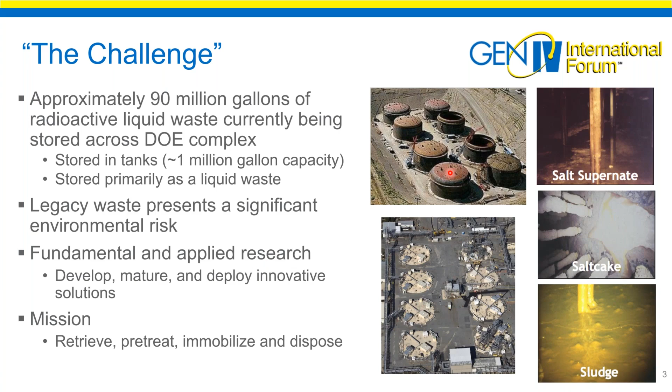But ultimately, the mission is to retrieve this waste and immobilize it in a stable waste form for long-term disposal.

So here's an outline of the presentation. We'll talk about the integrated flow sheet, and I'll mention the flow sheet aspects in a second. We'll talk a little about waste generation and the troublesome components. I'll discuss this through the lens of the vitrification facility, not so much the processes that generate the waste. We'll take a deep dive into immobilization operations, since I spent the majority of my career in this space.

Specifically, we'll talk about the batch to glass conversion process. We'll talk about critical process and product performance properties of the glass that need to be met, why they're needed, and how they relate to operations. We'll talk about models and algorithms that ultimately control the process, and then operational windows and operational flexibilities. This will be my key message today, and hopefully you walk away with that.

I'll sprinkle in a couple of operational considerations or examples to show why it's important not only to focus on your particular unit operation, such as the vitrification process, but to see that entire landscape, the whole flow sheet.

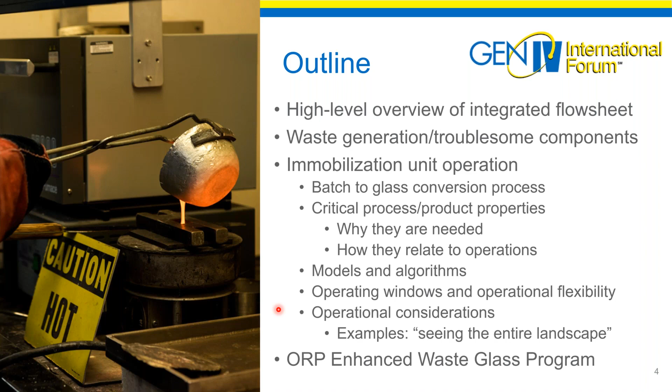Then I'll wind up talking about an ORP program, the EWG program - Enhanced Waste Glass program - and the impacts it's having on this particular mission.

Before I show you the Hanford integrated flow sheet, I wanted to define what I mean by flow sheet. There are a lot of different contexts out there, but you can think of this as material flow, or the series of complex reactions or chemical processes that occur to meet the mission - to retrieve, pretreat, immobilize, and dispose. So when you hear me say integrated flow sheet, that's the process I'm talking about. The one at Hanford is probably one of the most technically challenging efforts in the DOE complex, if not internationally.

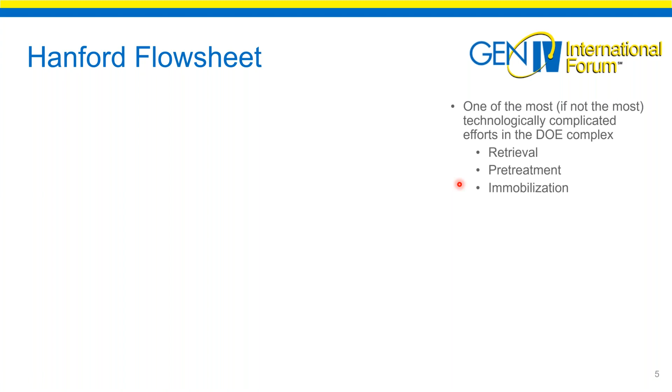The baseline flow sheet for Hanford originally looked like this. We have waste stored in tanks - we'll talk about that in a minute. There are 177 tanks, about 55 million gallons at Hanford. That waste was going to be retrieved - both the sludge and the salt or supernatant fractions - and come into a pretreatment facility.

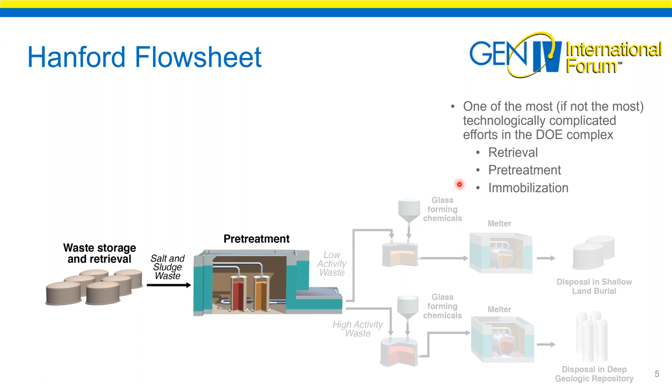The pretreatment facility was going to split that waste stream into two vectors: a low activity waste and a high activity waste stream. The low activity waste stream would come into the vitrification facility, into a receipt vessel, where depending upon the composition of that feed vector, we would add glass forming chemicals, making a melter feed targeting a specific glass composition. That melter feed would come into a high temperature melter operating at 1150 degrees C, be converted into a glass product, poured into a can, and those cans would ultimately be disposed of - for the low activity waste side, on-site in a near surface land disposal.

On the high level waste side, we do the same thing, depending upon the incoming feed vector and its composition.

We would add glass forming chemicals to make a melter feed targeting a specific glass composition. That melter feed would come to the melter at 1150, producing canisters that ultimately go into a deep geological repository.

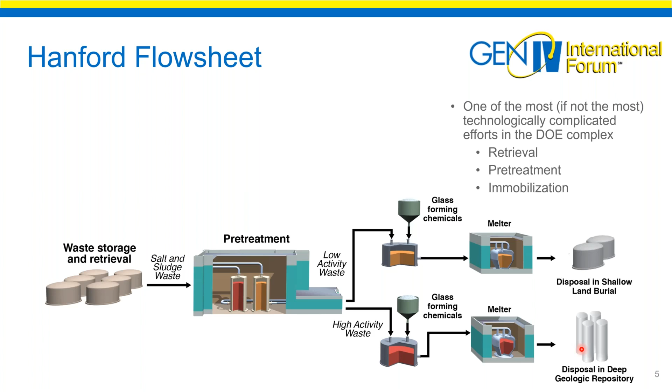Due to some pretreatment technical issues, the Department of Energy decided to take a slightly different route to start operations sooner. This is what I'll refer to as the direct feed low activity waste, or DF-LAW flow sheet. In this flow sheet, they focus on the LAW side, or low activity waste side, which is primarily the supernatant or the dissolved salt cake.

That salt cake and supernatant would be retrieved and come to a pretreatment facility called tank side cesium removal, or TSCR, where they would do filtration and ion exchange to remove the cesium, keeping downstream unit operations contact handleable. That decontaminated salt solution would then come into the vit facility into a receipt tank.

Again, depending upon the incoming feed vector, you would add glass forming chemicals to target a specific glass composition. That melter feed would be pushed into a melter, converted into glass, put into a canister, and ultimately go to a repository or the IDF disposal facility.

So again, we're going to look at the integrated flow sheet. That was an example, a really high level, 60,000 foot example of the WTP integrated flow sheet.

So I've talked a little bit about the tank farms—that is, the tank farm strategies. We're not going to go deep into it, but you can have retrieval, blending, and washing strategies that all come into play on how the downstream feed vectors interface with either the pretreatment facility or the vitrification facility. Hopefully that'll become obvious in a few slides, how the tank farms can have a significant impact on downstream unit operations.

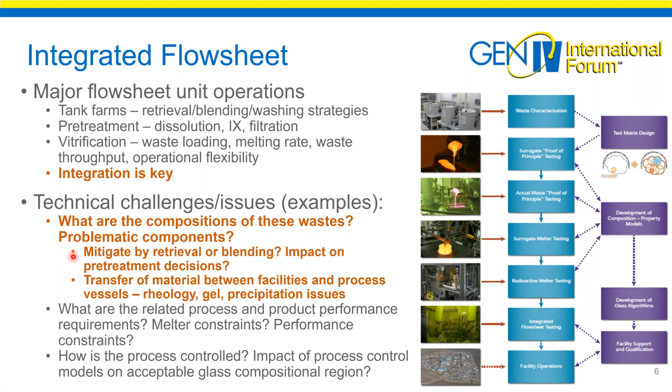There are a lot of things that happen, as we talked about in the tank farms and pretreatment facility, that have to be looked at in terms of whether you can mitigate problematic components through retrieval or blending strategies, and what impact these components have on pretreatment decisions. You also have physical property issues in transferring materials between facilities and process vessels—rheology, gel, precipitation issues—that all play a part in decisions made in each unit operation to maximize the overall efficiency of the flow sheet.

So I'm going to come back to this slide because there's a key point I didn't talk about on that challenge slide.

We've talked about the 90 million gallons of radioactive waste stored across the DOE complex from the defense program. It's primarily stored as liquid waste, with the high level fraction being sludge, and saltcake and supernatant usually being the low activity fraction, with the exception of cesium that's removed by ion exchange. That 90 million gallons is spread across approximately 230 tanks at 3 primary sites.

Those sites being Hanford in Richland, Washington, Savannah River Site in Aiken, South Carolina, as well as Idaho. Idaho has both a small volume of sodium bearing liquid waste, but they also have calcined waste, which is aluminum and zirconium calcine. We're not going to talk a lot about Idaho today.

We talked about the legacy waste being a significant environmental risk, and about the fundamental and applied research that people across the complex are doing, not only to develop these innovative solutions and mature them in terms of deployment, to technically underpin the retrieval, pretreatment, and immobilization processes. One thing that's really important from the perspective of this presentation is I always tell staff: when doing that applied and fundamental research, have an eye toward implementation. Do your research with a focus. Do your research to define a baseline.

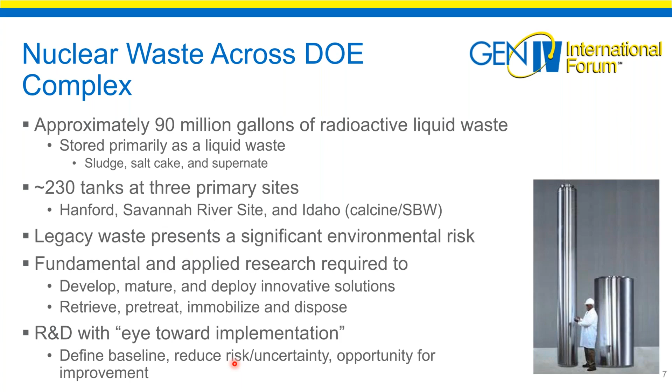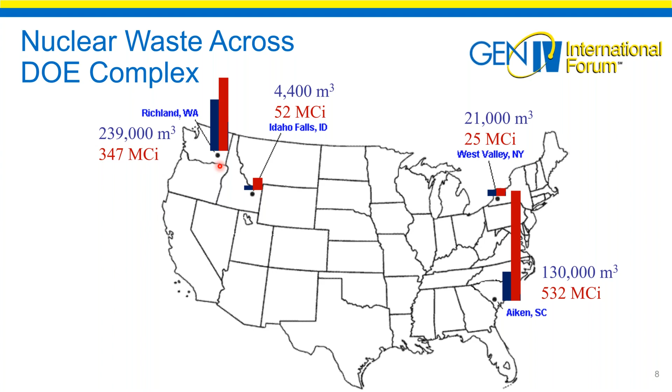One may wonder why that is. That ultimately comes from the differences in reactors and their efficiencies, and how the complexity of those compositions resulted. So how was the waste generated?

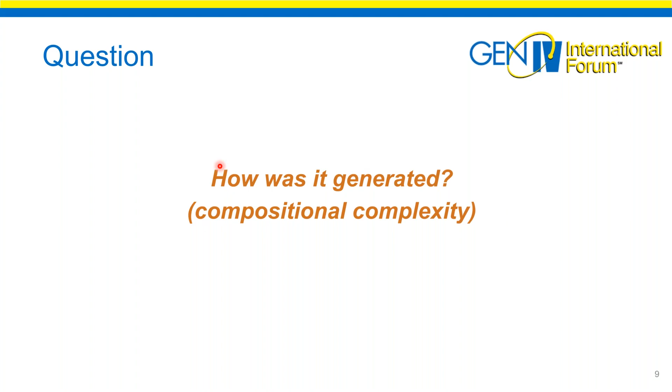I want you to look at this not only from the perspective of the unit operations. My point is to show you the complexity of the waste streams that were produced and how those ultimately came into the integrated flow sheet. To support the U.S. defense program, Hanford had 9 operating reactors, 4 fuel reprocessing flow sheets, and in total they processed about 100,000 metric tons of fuel.

The general waste generation flow sheet: the 300 area at Hanford was really the fuel fabrication site where they produced unirradiated or 'green' fuel rods. Those rods ultimately went into one of the 9 reactors - the B reactor coming online first in September of 1944, transitioning all the way up to the N reactor coming online in 1963. Those green fuel rods ultimately produced spent fuel.

The spent fuel went into one of 4 fuel reprocessing flow sheets, the first being T plant, which came online shortly after the B reactor in 1944. I'd like to point out the bismuth phosphate flow sheet for T plant as well as B plant - that was not utilized at Savannah River, which will ultimately come into the compositional complexity and differences between the two sites.

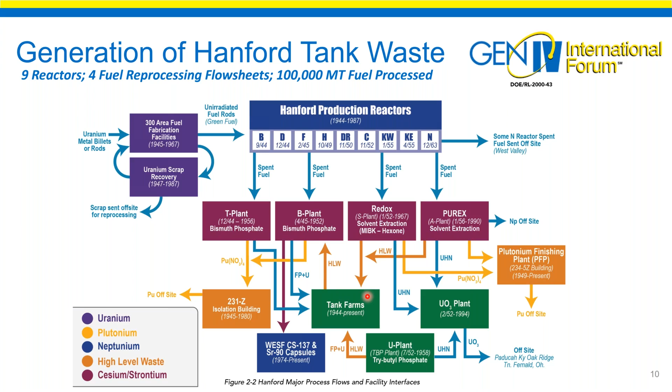So obviously the periodic table, the green boxes are the waste components that you would find not only at Hanford but at Savannah River. The one thing I want to mention is that it's basically a periodic table, a complex concoction of waste within the tanks. Those waste streams vary not only within a tank, but between tanks and between tank farms. One thing not shown in this slide is a third dimension in terms of volume or concentration of these components between Savannah River and Hanford.

I mentioned the T plant coming online with the bismuth phosphate flow sheet. Both of these are green for both sites. The bismuth and phosphate at Hanford are significant issues. On the high level waste side, they are not significant issues at Savannah River because they didn't really run a bismuth phosphate flow sheet, primarily redox and HM.

The aluminum concentrations are also pretty significantly different. When I was at DWPF, and things may have changed in the last 5 years, I saw feed vector concentrations from the system planning group - the highest feed vectors I saw then were roughly around 30 to 38% aluminum oxide coming into the vit facility or into the planning process. At Hanford, I've seen feed vectors of aluminum oxide coming in at greater than 90 or 95%.

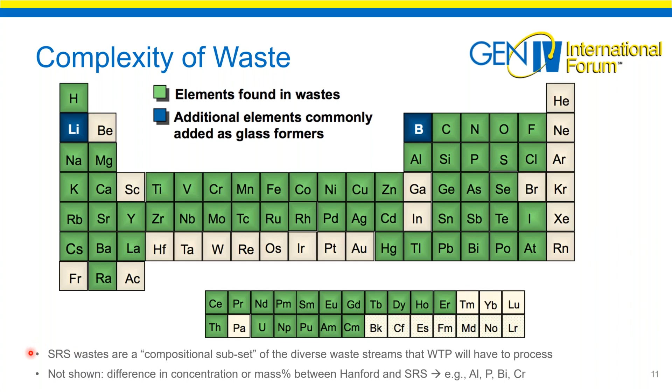I'm not going to go through all the elements, but recognize that the differences in the reprocessing steps used between the two sites ultimately generated not only differences in the elemental compositions of the waste, but the concentrations of that waste. If I generalize this, I can think of the Savannah River sites as a compositional subset of the Hanford waste streams from that perspective.

So looking at the breakdown of the waste at Hanford, these multiple reprocessing operations are driving some distinct compositions that we were having to deal with at Hanford. The waste is primarily a sodium nitrate, sodium nitrite mixture, and that's due to all the additives that were being used during the reprocessing process.

This is primarily the supernatant fraction - the liquid and the salt cake - destined to go to the LAW side in the flow sheet, which would be critical after a while. We also have sulfate from some additions that were used in the reprocessing flow sheet.

Out of the 16% others, you can see phosphate being about a quarter of that 16%. That's from the bismuth phosphate flow sheet in T and B plant. We've got the bismuth component there. Aluminum is about half of that 16%, which comes mostly from the aluminum clad fuel rods, primarily, but some aluminum was added in some other places. We have zirconium and silica as well.

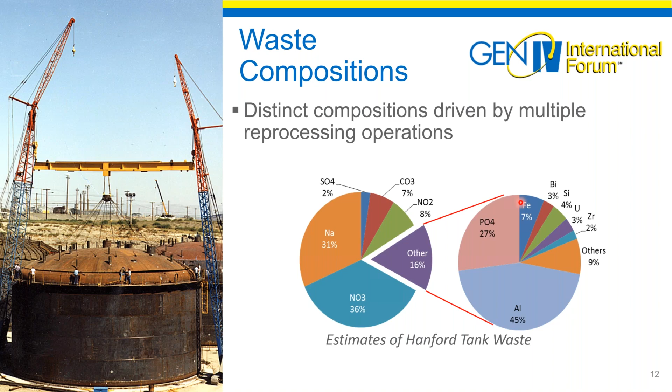The reason I want to point this out is these are the components that ultimately drive what decisions are being made in terms of a blending strategy, retrieval strategy in the tank farms, some kind of pretreatment strategy in the pretreatment facility, and ultimately, if those components are not removed up front in the vit facility, you're going to have to deal with these specific components because they're going to drive glass formulation efforts.

This slide is going to show you two critical differences between the Hanford and DWPF flow sheet. This is a really small plot, and I apologize for that. This is a look at the feed vectors coming into the LAW vit facility.

This may be about 5 years old, so maybe a little out of date, but the concept is still clear. This red line is the sodium concentration, the green line is the sulfur concentration, and this purple line is the aluminum concentration. These are feed vectors coming into the facility as a function of time on this x-axis.

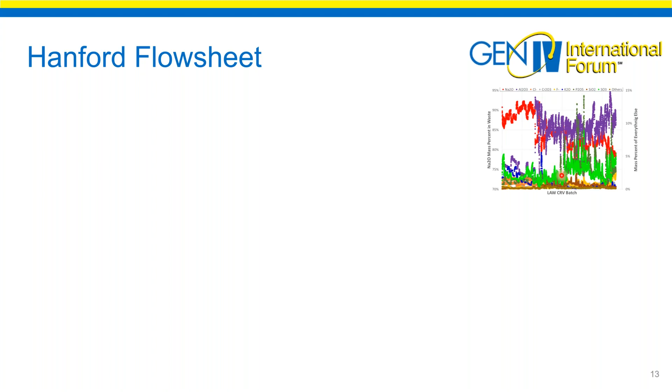So you can tell that these feed vectors are just jumping up and down pretty regularly, if not on a weekly or a monthly basis.

Now that drives a huge difference between the two flow sheets. Again, the Hanford baseline flow sheet: waste coming in, pretreatment separates that into low activity and high activity streams. We would add glass forming chemicals to the incoming feed based on that feed vector composition, put that into a melter, produce the glass, and then ultimately it goes to disposal.

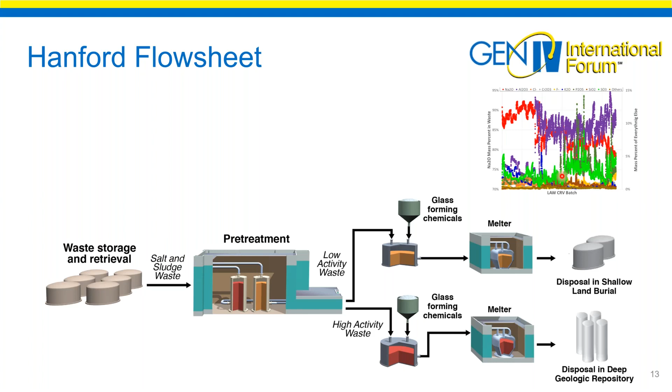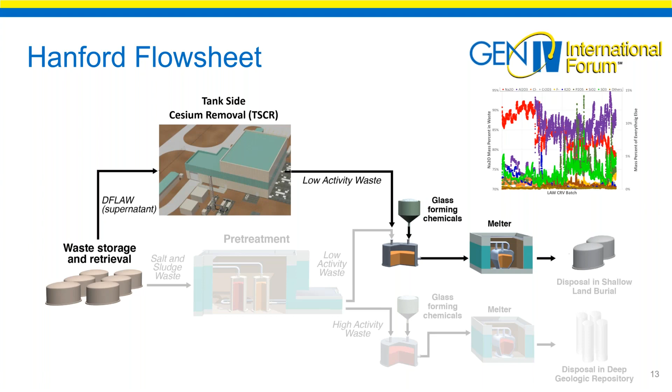That's a huge significant difference between the flow sheets, because if I compare the Savannah River flow sheet, obviously they have waste out in their tank farms. The high level waste comes down through there into a receipt vessel. The supernatant and the dissolved salt cake comes into the SWPF facility.

Where basically the cesium, strontium, and actinides are removed. The LAW fraction comes in. A huge difference is that at Savannah River, the LAW is grouted and goes to a low activity disposal facility, whereas the HLW fraction, the cesium and sludge fraction, is blended with a prefabricated glass.

These are not GFCs. This is a prefabricated glass product designed to tolerate the incoming feed vector, because that feed vector is relatively constant over a year, if not more -- it could be up to 2 or 3 years. So there's no reason to have the ability, the agility, or flexibility to change the glass forming chemical concentration, because you have a constant incoming feed vector relative to the Hanford flow sheet.

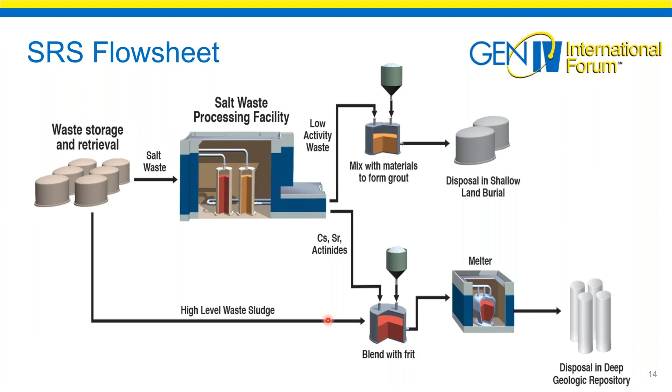So let's take a little bit deeper dive into the glass unit operation. Hopefully you're getting a handle on all the different unit operations of the integrated flow sheet, but this is going to start drilling down into the vit facility.

Key terms: waste loading. That is nothing more than the amount of waste, which is calcined at that time, contained in each canister. So if I said I had 100 kgs of glass and it was a 20% waste loading, you would have 20 kgs of waste, and the rest of that 100 kgs, the other 80 kgs, is going to be the glass forming chemicals that you've added.

So obviously you want to target a higher waste loading per canister, because for a given amount of waste, you're going to produce fewer canisters that you're ultimately going to have to dispose.

Melting rate, you hear a lot of people talk about melting rate, and that is nothing more than the conversion of that incoming liquid feed stream to a molten glass state. This liquid feed stream is the supernatant fraction coming in with the glass forming chemicals added. That liquid is fed into that melter, and that melter has to basically convert that liquid feed into a molten glass to pour glass into the cans.

So you hear people trying to drive toward higher melt rates -- filling canisters faster so they can produce more canisters per unit time. Those are typically the two main concepts that people think about in the vit facility.

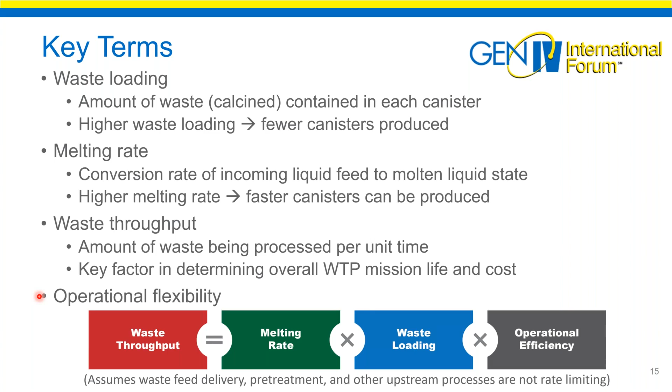The other thing people rarely talk about is operational flexibility. This is a key driver from an operational standpoint. If you're the engineers operating the VIT facility, you want large compositional spaces to operate in—you want the compositional space over which acceptable glass can be made to be as large as possible, because it gives you options in your operations that you wouldn't normally have with a very small operating window. Hopefully this concept will be solidified by the end of the presentation, but it's key to focus on, specifically for the integrated flow sheet at Hanford, though it may apply to your flow sheets as well, just in a different application.

Here's a slightly different look at the WTP, or DFLAW, the direct feed low activity waste flow sheet. Two different tank farms hold the 55 million gallons of waste. This flow sheet uses the supernatant, or the dissolved salt cake that is retrieved. It comes into the TSCR unit where you do filtration and ion exchange to remove the cesium. That decontaminated salt solution comes into the VIT facility. There's secondary waste coming off the melter that's recycled back into the facility, which has to be handled—that secondary waste goes into another facility called LERF-ETF, where it's immobilized and sent to an integrated disposal facility on site. The low activity glass then goes down this route and ultimately into the IDF once it's poured into canisters. So again, we're focusing on this VIT facility, the green section.

We talked about waste loading and melting rate, but not much about operational efficiency—basically the percentage of time the facility is online. That's primarily not in the hands of the vitrification or glass formulation guys. We typically focus on waste loading and melting rate, and when you bring in operational efficiency, that ultimately determines the waste throughput.

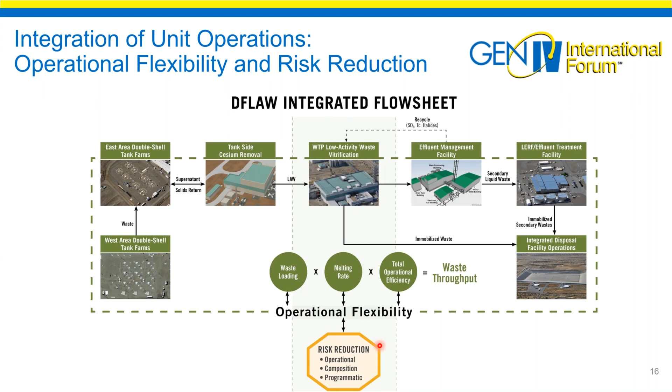We did talk about operational flexibility, but only in the context of the VIT facility. That operational flexibility needs to be looked at holistically across the whole integrated flow sheet: operational flexibility in the tank farms, giving people options; operational flexibility in TSCR, the pretreatment facilities; and operational flexibility in the VIT facility. Those communications have to be really sound in order to maximize the overall efficiency of the whole integrated flow sheet. That operational flexibility can actually help with risk reduction, whether operational, compositional, or programmatic.

So here's an example of an integrated flow sheet. A lot of people might be wondering, what is pretreatment? Why would you even perform pretreatment? And the question I'd ask is, could pretreatment actually have a negative impact?

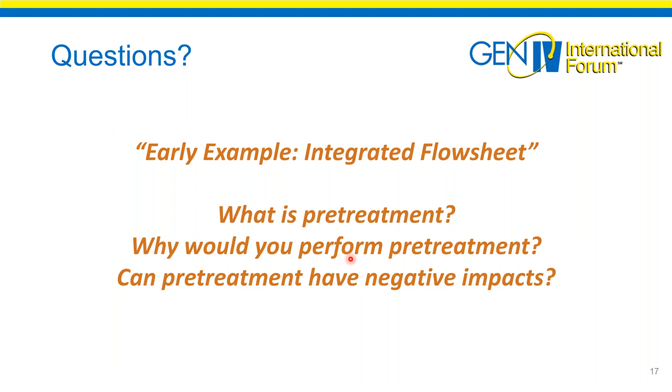I'm going to switch gears a little bit—this is now the high level waste side, the sludge fraction we talked about. This is a study by Dong Sang Kim and John Vienna at PNNL back in 2011. I understand it's 10 years old, but the concepts are still very valid. What they did was take the incoming feed vectors for the HLW facility and calculate the maximum waste loadings for each feed vector in terms of the glass formulation. But they were most interested not only in the maximum waste loading, but what dictated them from going higher in waste loading space. For example, they found that almost 50% of those feed vectors were limited in waste loading space by high alumina. Remember, I mentioned some feed vectors have 90-95% alumina—well, here's where it starts showing its ugly head, because that alumina is dictating waste loading for about half of those feed vectors in HLW space.

They found that chrome limited and sulfur limited about 20% of those feed vectors. They found about 10% were phosphate, bismuth phosphate flow sheet. That's where this phosphate difference is coming in. You will note that only 1% of the sodium

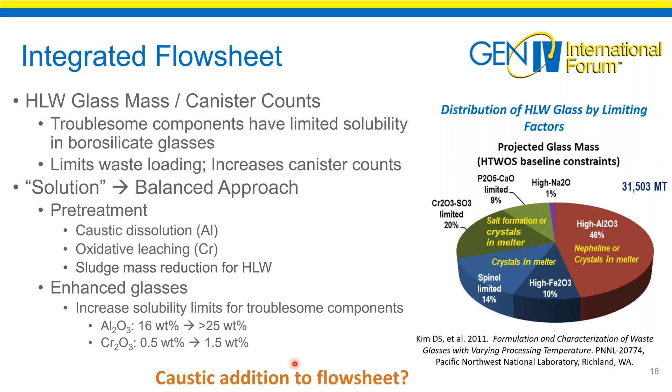So if you can reduce the amount of pretreatment you need to do, you reduce the amount of sodium you're adding to the overall flow sheet, and you can have a positive impact not only in the HLW side, but the LAW side.

So here was another example of when I was at Savannah River National Lab. We were looking at a specific sludge batch coming into the system from the planning group. It was a high aluminum feed. They wanted to do the aluminum dissolution, add caustic to the feed or prep tank to reduce the aluminum content in terms of that sludge mass reduction.

During the planning phase, the system planning guys were looking at how effective, based on some results that Savannah River National Lab was presenting, aluminum could be pulled out. They were projecting how much aluminum could be removed based on the sludge coming in and the form of the aluminum, since it was gibbsite you could remove almost all of it. So the planning group said, okay, we're going to remove a high percentage. They did a very good job projecting those low concentrations of aluminum, but what they failed to realize was that we had a lower aluminum concentration requirement in glass for durability. So based on the incoming projections, we said, hey, you can't remove all the aluminum, because we'll have to add that aluminum back to the frit to meet the lower aluminum content specification for glass durability.

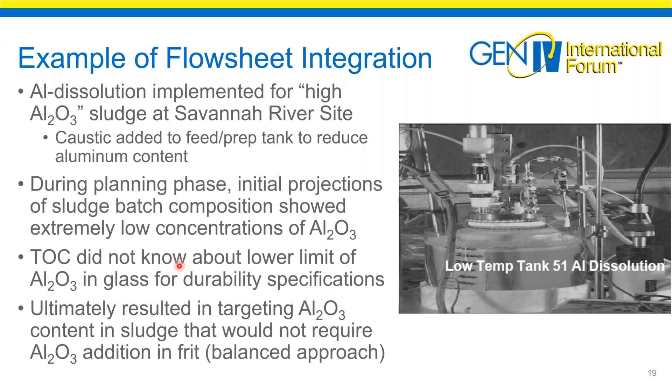This shows the interplay between systems planning, which ultimately rolls into pretreatment or aluminum dissolution, and the glass team. These lines of communication need to be open, or you can find yourself in a very bad spot in the vitrification facility. In that case, you would have found yourself adding aluminum to a frit that the manufacturer couldn't have made, because of limited technologies they had.

So let's now shift and talk about some challenges within the vitrification process. We've talked a little about this. I'll refer to this as a conceptual flow sheet, but ultimately this process is nothing more than converting waste into a glass product, at a 65,000 foot level.

The next step down: you're basically taking the sludge or the supernatant, adding glass forming chemicals, adding a little bit of heat to produce the glass, pouring that glass into canisters, and ultimately those canisters of glass are going to go to a repository or near surface disposal facility.

If we strip another layer off that concept, you're going to be retrieving specific sludges and supernatants. Again, there's a blending strategy that could be relied upon. You're going to do some kind of pretreatment of that sludge or supernatant, whether it's dissolution, ion exchange, filtration, or washing. That high-level waste sludge fraction, the solids or the decontaminated supernatant, are going to be transferred into that vitrification facility.

Again, based on the incoming feed vector, the composition of that feed vector, you're going to add glass forming chemicals. We're driving toward how we're controlling this process. We're going to talk about the process control strategies in a minute, but hopefully you're starting to think some questions like, how do I know what glass forming chemicals to add? And how much do I add? Those are all going to be driven by this process control strategy.

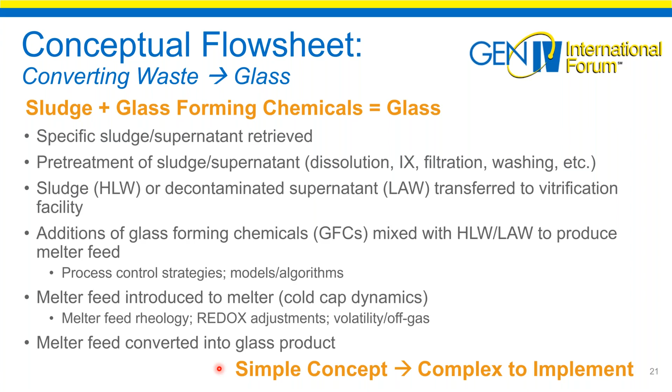Implement may be the wrong word. It may be to choreograph. There's a lot of critical decisions that need to be made. Those decisions need to be underpinned technically because this is a feed forward flow sheet. That is, once that glass is made, there's no rework of the glass. That glass has to meet the durability specification as defined by the end disposal system, as we'll talk about in a few minutes.

Another part of this is scaling. A lot of researchers, maybe you're listening to this talk and doing work in the lab, doing a lot of vitrification melts. These are crucible scale melts in a lab. You may be trying to make a glass to measure some property, or looking at little small melters to study melt rate, volatility, or cold cap behavior.

But ultimately, with this eye toward implementation, you better be thinking about DWPF's shielded cells and process vessels within the DWPF. You've got to be able to translate all this lab-scale work to an operating facility, because you're not going to be vitrifying 55 million gallons of glass in a crucible. Well, you could, but it'd take forever. You need to scale these issues to make sure operation is efficient and effective at a very large scale.

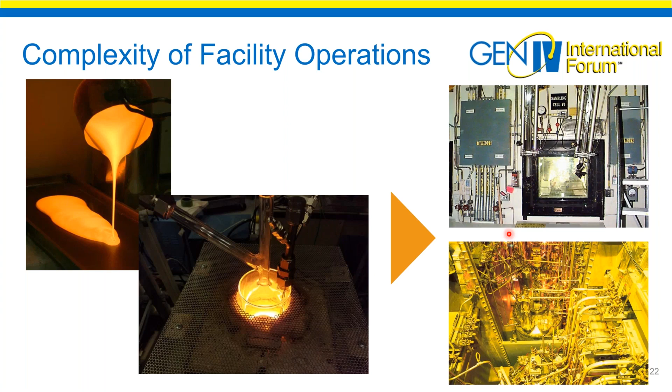So how does that development stage look as it matures? Obviously, you've got waste characterization. You'd like to know the waste compositions of incoming feed vectors, maybe globally, or for a specific tank farm, or a specific tank you're interested in handling. You need to know what that feed vector looks like.

You can then go do what I call proof of principle surrogate testing in the lab. You can make glasses using oxides and carbonates, since you really don't care how you get to the glass composition, you just need to reach it. Typically what you're trying to do is cover the composition space that the facility may ultimately be processing over.

You may come in and do actual proof of principle tests with real waste, since up to now you're using surrogates. You need to make sure those surrogates give you the same property values you're interested in. You may also do surrogate melter testing, or even small scale radioactive melter testing to look at melt rate issues, foam potential, and similar things.

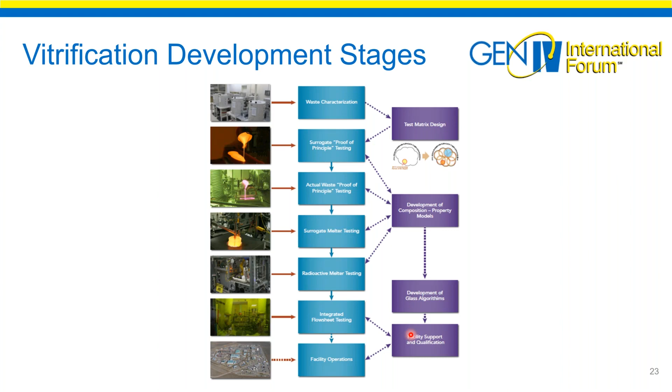But all these things you're doing in the lab have to feed into the models we're going to develop, or observations we note, that ultimately lead to a process control strategy that runs the facility and makes decisions on what GFCs to add. Can we process this through the melter? Will it meet the durability specifications for where the glass is going?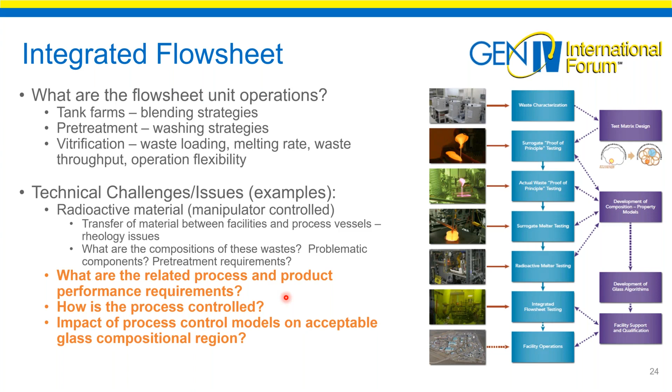That's what I'd like to transition into now. We'll talk about process and product performance requirements, how this process is controlled, and the impact of those process control models on the acceptable composition regions, or operating window, in glass space or the vitrification facility. I'm not going to go through this in detail again, but I'm driving now into this space.

Remember, we had variation in feed vectors coming into the facility that, based on the components, would go up and down daily or weekly. We have flexibility with GFCs to react to that variation, but how do we make those decisions? What GFCs do we add? I think there are 11 or 13 GFC chemicals for LAW and HLW space that we can add based on the incoming feed vector. How do you select which chemicals and how much to add?

How do you know what waste loading to target to make sure it makes it through the melter and produces a durable product? We need compositional property models, glass composition property models, that relate the properties of the glass to its composition, to be able to make these kinds of decisions. We'll talk about that.

Again, we need to make sure that if it goes into that melter, it's actually going to melt at 1150, that it will meet liquidus temperature, viscosity, and we'll talk about some of those in a second, as well as durability specifications, whether it's going to IDF or to an HLW space, the geologic repository.

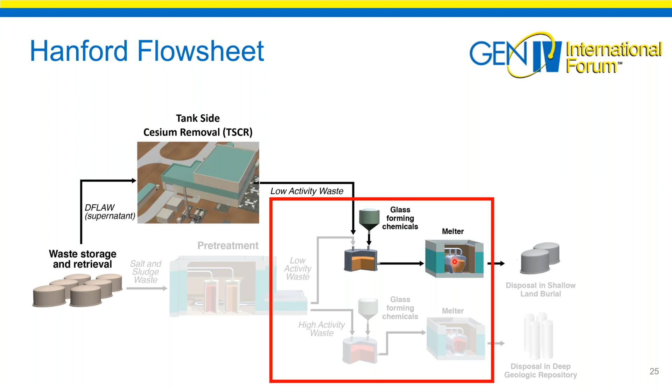The process control models are key because once that glass is poured into a can, it is not reworkable; you can't remediate it at that point. You can potentially remediate it earlier, if you take a composition from the melter and find your models predict it's going to be bad, you can make some adjustments. But you really want to make sure this feed-forward process control strategy is technically underpinned and sound, because those decisions are critical with respect to melter operations and product durability.

So I refer to this slide as 'what goes in must come out, must be durable.' That is, the melter feed that comes in has to go into the melter, it has to come out of that melter, and it has to be durable.

This top right diagram is a cross-section of a general melter, a joule heated melter. This slurry feed is the waste glass-forming chemical mix, the melter feed I was talking about. It's a liquid feed that comes into the melter through a feed tube. There's a melt pool sitting at the bottom, nominally at 1150 degrees centigrade. This slurry feed comes in, and...

Hopefully it spreads across the glass surface and forms what we call a cold cap. The cold cap is a blanket, transitioning from unreacted feed at the top to almost glass at the bottom. That's a pretty simplistic view, but it's a blanket of unreacted feed in which a lot of complex reactions go on.

And those complex reactions can induce some really problematic things, components or events in the melting process. If that initial liquid phase that forms as these raw materials start to melt is a high viscosity liquid, you have a lot of nitrates, carbonates, nitrites, all trying to come out of this system at the same time. You can actually capture those gases in a high viscosity liquid and create a foam layer at this interface.

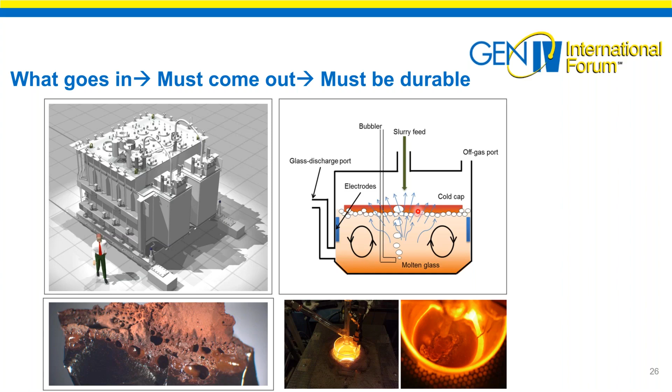So we talked a little bit about balancing key properties. You heard me say what goes in, what comes out. What that really means is we have processing constraints from a melter perspective - we have viscosity constraints, we have liquidus temperature, and we have electrical conductivity constraints.

I forgot to mention on this last slide, this is a joule heated melter where current is being passed between the two electrodes. If you can't pass current, your melter will freeze - your glass temperature goes down and your glass solidifies.

But this is not an inclusive list. This is just three of the critical components that we have to control, to make sure that melter feed, once it's in that melter, will meet these specific processing constraints.

We also have product performance constraints, just generally called durability. For HLW space, it's the Product Consistency Test A - I'm not going to get into that - but for LAW at Hanford, it's both the Product Consistency Test A as well as the VHT response. But just recognize that you have melter constraints, or process constraints, as well as durability or product performance constraints.

And it's these process control models that have to look at every one of these constraints, be able to predict them in real time, and compare them to some acceptability limits we'll talk about in a minute, to make sure that the melter feed you're designing will actually make it to the melter, through the melter, and meet the durability specs. On top of that, a lot of the contract obligations in terms of minimum waste loadings or production rates have to be folded into your decision-making process with these process control models.

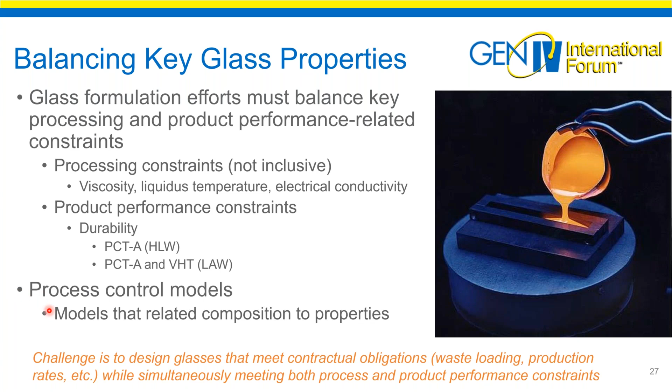But again, these process control models are nothing more than mathematical models that relate composition of glass to a specific property. And to do that, you need data, obviously.

Typically, what you try to do is design a statistically designed test matrix of glasses to cover some compositional space. It may be a tank, a tank farm, or a certain period of time that the feed vectors will cover, but you want to cover some kind of glass space that you think you want to process in the facility.

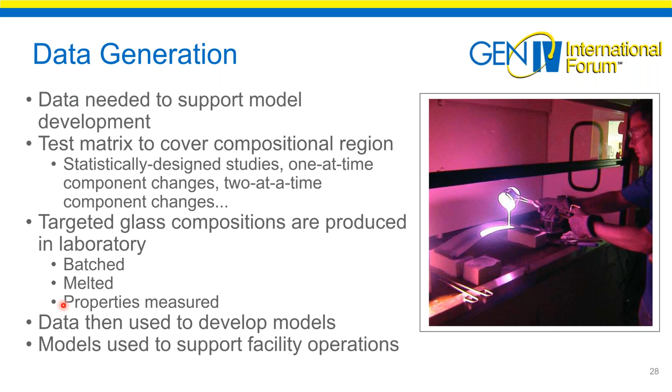So you define a handful, maybe 20 or 30 glasses within a study, statistically spread out in that multidimensional composition space, and you go make these glasses in the laboratory using oxides and carbonates. You melt those glasses and pour a glass product like we're showing over here on the right, targeting this specific glass. Then you measure the properties, and now you have a relationship you can develop over that space between the property of the glass and its composition. Those are what's used to develop the models that support facility operations.

Let's see if this will work. So this is going to be very jumpy, bandwidth is killing me, but this is a technician in the lab.

Basically, somebody's handed her a batch sheet to target a specific composition for one of those 20 or 30 glasses in this test matrix. There may be 20 or 30 different components of this glass that she needs to target. She'll weigh those out using reagent grade chemicals, and she'll ultimately batch it all up and put it into a platinum crucible.

Let's see if this video will play... looks like I'm locked. Here we go, it'll probably skip because I've touched this thing.

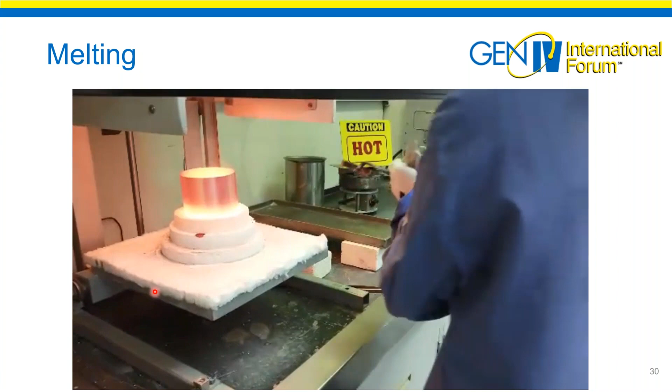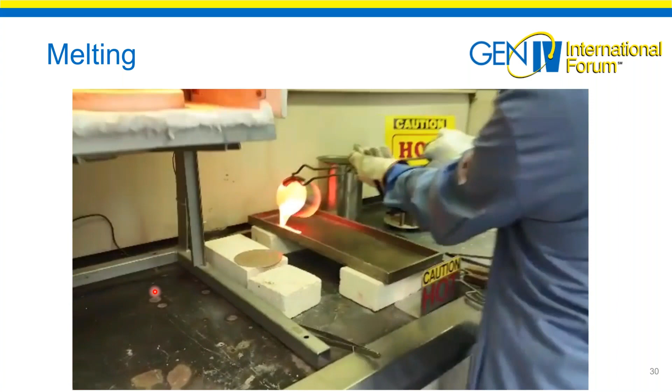So here the raw materials have been put into a platinum crucible. This technician is going to pour it into a stainless steel plate. What results is a glass pour patty, if you will, that can be used as a sampling stock to measure properties of interest, whether it's viscosity, electrical conductivity, or durability. You know the composition of the glass you made, you can measure the properties, and that's how you get these composition-property relationships.

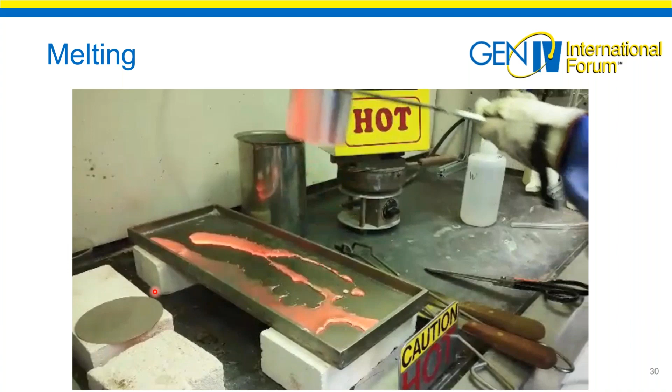Let's see, did I skip one? Nope, sorry about that. So what properties will you be interested in? We talked a little bit about them a few minutes ago. Crystallization is obviously a significant concern in the melter.

This is associated with the liquidus temperature, which is the temperature at which, if it's above the nominal melter temperature, crystals can actually form in the molten glass pool itself, or within the cold cap, and either grow or settle within the glass system. Here's a laboratory crucible, this is the bottom of it, showing spinels that formed in the bulk glass, basically raining down and precipitating, forming a layer at the bottom of the crucible.

If that happened in a joule heated melter, you'd have a spinel layer at the bottom. Those spinels are conductive, so the joule heat current would actually start coming through the spinels and not through the glass, which would have a detrimental impact on the temperature of the glass, and you could ultimately wind up having to change out a melter.

So obviously you need a model to control or limit the ability of crystals to form in this melt pool because of the negative impacts they can have—not only shorting out a melter, but they can also clog pour drains and pour spouts. These temperatures tend to drop a little relative to the nominal 1150, and they may actually disrupt flow within the melter in terms of a homogeneous system.

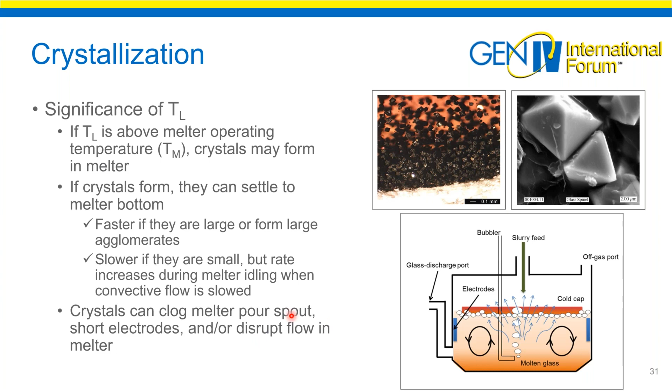So viscosity is another critical melter processing constraint or property we're interested in. Again, we need a model to predict viscosity as a function of temperature and composition. The reason we need viscosity control is if the viscosity is too low—I failed to mention these melters are generally lined with some kind of refractory, like a K3 refractory—the low melter viscosity can actually increase refractory wear. It can also increase corrosion and erosion on any materials you've introduced, such as a bubbler designed by, say, VSL, to improve melt rate.

You can actually potentially reduce the life cycle of not only the bubblers but the electrodes. In general, you increase volatility of certain components if the viscosity is too low. If the viscosity is too high, you can have incomplete melt homogenization, which can be kind of overcome with bubblers. You could also have hindered or inability to actually pour glass.

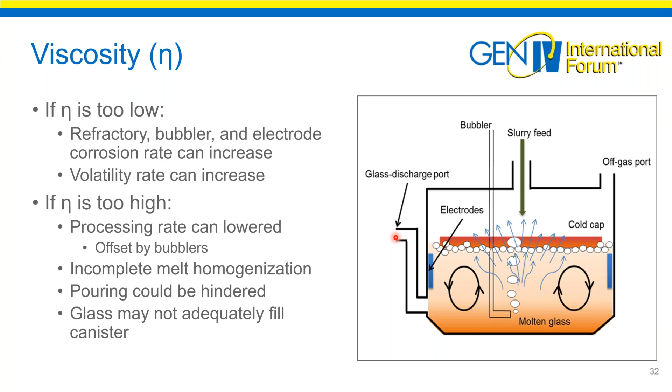If the viscosity is too high, the glass may not make it out of the throat, and as it comes out of the throat you may not fill the canister because of viscosity. What you'd like to see is the glass being poured into the canister spread across the cross section of the bottom of that canister as it's being filled. But if the glass is too thick, it may stop and not fill, and you may have a partially filled canister. So the ability to control and understand viscosity before you introduce that melter feed to the melter is critical.

Another significant impact is sulfur. We talked about that in one of the pie charts back - that's a component added in the reprocessing steps. This is what happens if the sulfur solubility limit is exceeded. This is a picture taken by Keith Matlack of VSL, where they took a threaded aluminum or metal rod into the cold cap. This was a melter test to look at sulfur solubility, and obviously they've exceeded it here unintentionally. You can see this yellow salt sitting on the surface.

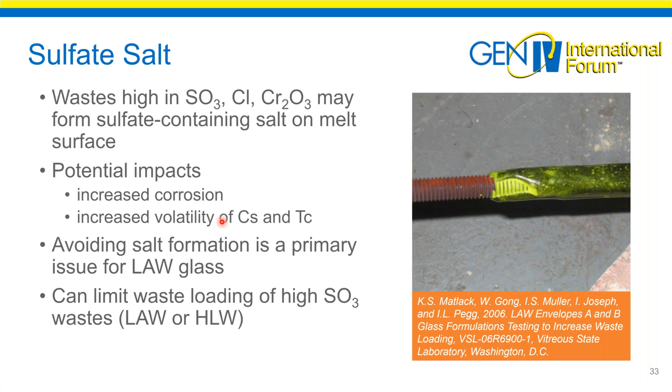This is a very aggressive salt layer. It will impact K3 refractories, it will bore holes through them, and it will increase the volatility of cesium and technetium out of a LAW system. So avoiding salt formation is critical, and having a model that predicts sulfur solubility or something like that is critical in those process control strategies.

Chemical durability is another component on the product performance side. Obviously the main objective of the whole flow sheet is to immobilize these hazardous and radioactive components in the glass to meet some kind of long-term performance metric. I mentioned the PCT, product consistency test A, is the durability requirement for HLW at Hanford as well as Savannah River. For LAW glass in Hanford, you have both the PCTA as well as the vapor phase hydration test. Again, two tests you can run over a compositional space to develop models to predict the durability response as a function of composition for unknown glasses within that space.

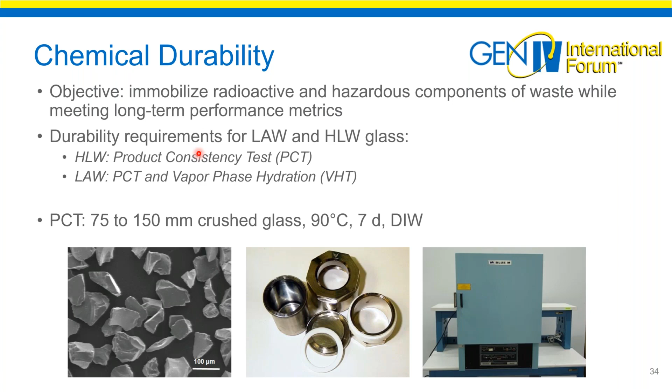This is a slide that I hesitated a little bit on putting in here, but I have the word general underlined. These are general composition property relationships, and I want to be very clear they're general. This is over a specific compositional space. It may not be applicable to a larger space or a different space. I want to make that very clear.

If you look at the oxides and the properties, I'll just pick a couple. If you increase the aluminum content within this specific space that John Vienna and Dong-Sang Kim looked at, viscosity generally increased. The electroconductivity basically had very little, minimal impact.

PCT is a little bit tricky. This is the PCT response - the actual durability increased. The response decreased, but the durability increased. But after some point, the aluminum concentrations actually made the PCT worse. That's shown over here: when you take a specific glass and start increasing the aluminum concentration, the PCT response in grams per meter squared will start to go down, meaning the PCT is getting better, the durability is getting better. But at some point that inflection occurs and the durability will go down. So you have non-linear things occurring.

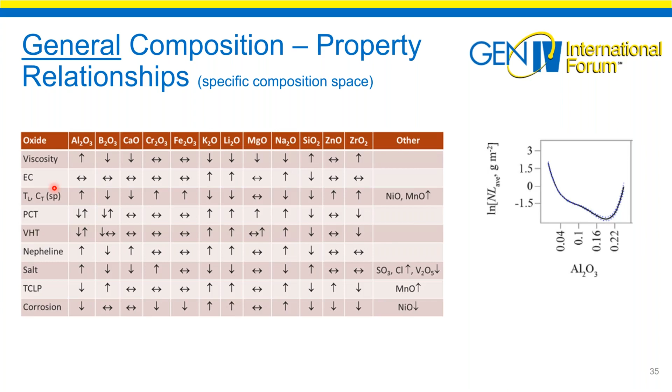Obviously I'm not going to go through everything, but you've got arrows going in every different direction. So you can't make these decisions on the fly by yourself, because you've got a multi-component compositional feed vector coming at you. You've got GFCs you need to add, and you need to predict these responses as a function of all these components for the glass you're targeting. It's an extremely complex system. That's the reason you're relying on these process and product control models to guide you to make low risk decisions - probably low risk decisions - for the GFCs you're adding to that incoming feed vector, to make sure the feed vector you're sending into that melter will make it through the melter, and the product you produce will be durable and meet the specs.

So here's a short list of the LAW property specs. The LAW glass coming out of the LAW melters in Hanford has to meet the PCT test, the PCTA, and the bar it has to meet is less than 2 grams per meter squared. When you run this specific test, if the boron, sodium, or silica release is greater than 2 grams per meter squared, it is an unacceptable glass composition. It should not be processed through the facility. So you need a model that's going to predict that PCT response, and you need to compare that prediction to this particular constraint to decide whether it's good or bad glass.

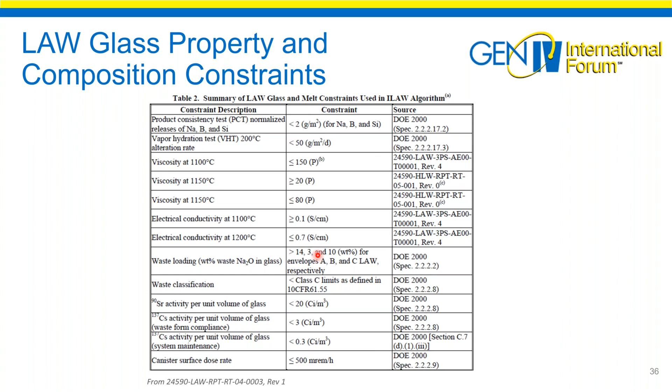And that concept's important. You've got viscosity constraints, high and low viscosity - we talked about that earlier. You've got electrical conductivity constraints. You've got waste loading constraints. You've got all these constraints, and you've got some kind of acceptability criteria that has to be met in order for it to be an acceptable glass.

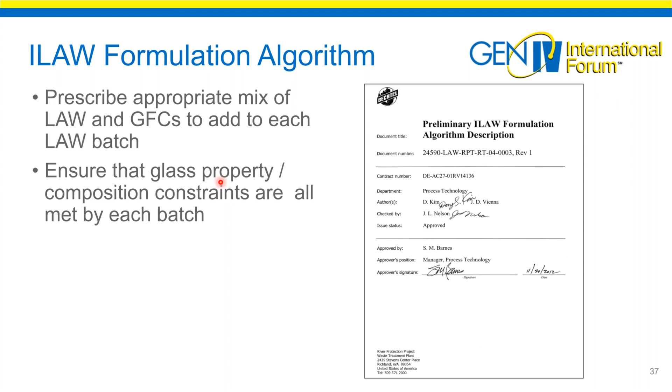All that is bundled up into a document that John Vienna and Dong-Sang Kim wrote for LAW for the baseline glass compositions. Ultimately, these models roll up into an algorithm that prescribes the appropriate mix of LAW and GFCs to add to each batch to maximize operational efficiency. Again, they're nothing more than these glass property and compositional constraints being looked at in terms of acceptability. So all that to get to this one plot.

So this is a plot that hopefully will try to bring everything together. This is a two-dimensional plot trying to represent a multi-dimensional compositional space. You can consider this to be either high-level waste or low-activity waste, take your pick. We'll take this end member down here to be a specific GFC or combination of GFCs, and we'll take this end member to be the other fraction of the GFCs you want to add - feed vector coming in, GFCs to add.

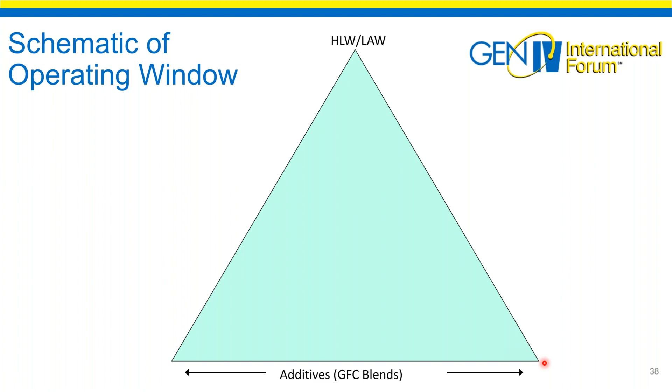Now I can take those two and look at waste loadings from 0 to 100%, and I have a huge space in composition space. It's basically a multifaceted hypercube, if you will, that shows me all the different areas - the range of alumina concentrations I could process, the range of chrome, whatever. So now I've got property models and I'm going to overlay them.

We've got constraints for liquidus, for viscosity or conductivity, for durability, and minimum waste loading constraints. So if I look at viscosity, we have an upper and lower viscosity. When I look at that entire multidimensional space, this side of this triangle basically says those glasses don't meet my viscosity constraint. You should not process those.

The liquidus model will start to partition, it'll cut off this space. You should not process because you will form crystals in the melter that may either clog a pour spout or result in a melter failure. Durability will cut off this space too - and this is obviously generic. You may have some minimum waste loading requirement that says you can't process at these low waste loadings. We want to force you toward higher waste loadings, toward this particular corner of the ternary. So what these models do is they ultimately define what I'll refer to as an acceptable compositional space - this box outlined in this little triangle.

But these models and measurements also have uncertainty. Once you apply the uncertainty of these models, compositional measurement, all the uncertainties that the statisticians love, that box ultimately shrinks more. This is the operating window I talked about earlier. Ultimately what you're going to do is target some composition. You're going to have to account for a lot of different uncertainties, but you want those models to guide you into what space you should be in with the highest waste load you can target and still meet all these other processing or product performance constraints. That is what the models are going to drive you toward.

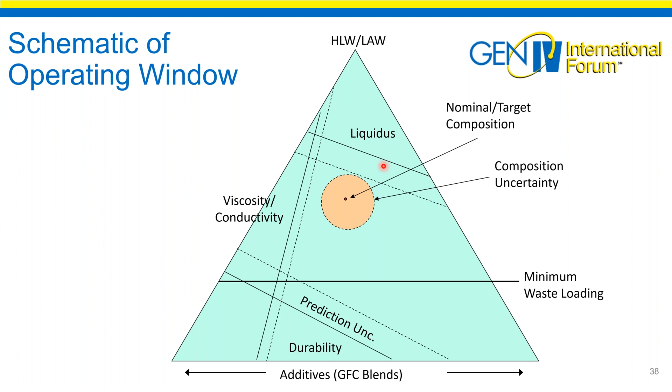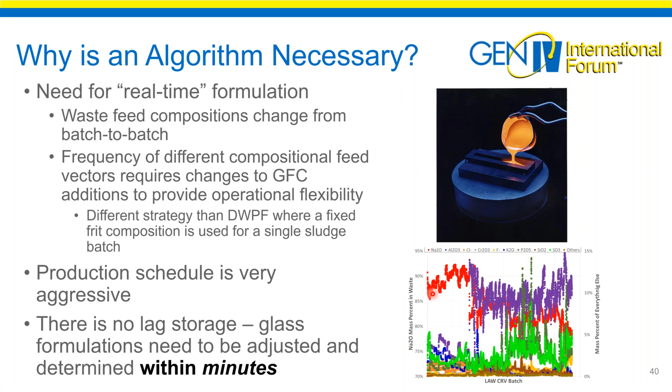The real driver here, we've talked about these incoming feed vectors for LAW. Those models are really required in the algorithms that I pointed you to in that document. You need to make real-time decisions, you don't have time to wait. The feed vectors and the processing or production schedules are extremely aggressive. You need to make decisions fast, and those decisions need to be low risk in terms of the melter feed processing as well as the product performance constraints. That's the key of these models.

The last couple slides here, I want to talk about some impacts. This is the EWG program, the Enhanced Waste Glass program out of ORP, the DOE office at Hanford. This program is under the direction of Albert Kruger. He's looking to expand that compositional space.

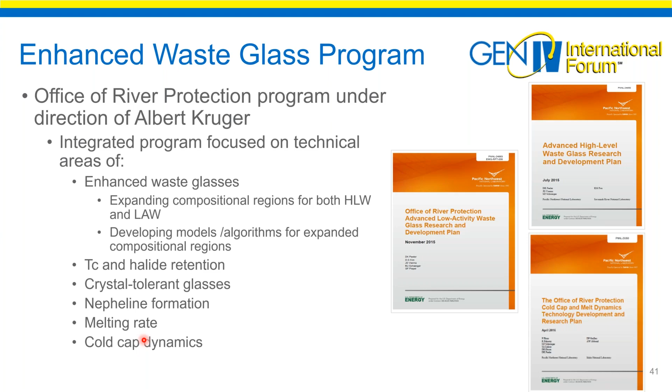That is, we've got baseline models that control both HLW and LAW. But if you look forward and want to expand or give operational flexibility in terms of operating, or even pretreatment, or maybe the tank farm impact those decisions, that larger processing window is going to be key. So Dr. Kruger's program looks at expanding these regions, developing new models, and reducing uncertainties within those models to increase compositional space. He's looking at Tc and halide retention, crystal tolerant glasses, nepheline formation, melt rate, and melt and cold cap dynamics. All these factors fit into waste loading, melt rate equals waste throughput, and expanding the compositional space.

Here's an impact. We talked about the aluminum going from 16 to greater than 25 and the impact it has on pretreatment. We talked about the chrome going from basically around 0.3 or 0.5 up to about 1.5, and the need to reduce oxidative leaching in pretreatment. And we haven't talked about sodium. Sodium is primarily on the LAW side, as I mentioned earlier, and the baseline was at 20% sodium, maximizing 20% sodium in glass, primarily for durability or low viscosity reasons. Albert's programs have taken that to 24% on these enhanced waste glasses, and that doesn't look like a lot, that 4 or 5% increase. They may be slightly higher than 24, but that is a significant reduction in LAW glass mass that's going to get reduced.

Here's some calculations that John Vienna and Dong-Sang Kim did as well. These baseline models that were used, they were going to generate about 18,000 canisters, I believe this is HLW. With the enhanced models going to higher waste loadings, they basically cut that in half, or over half, if you will. So again, these models, if you continue to challenge the baseline models to increase operational flexibility, they have significant impacts on life cycles of the overall facility.

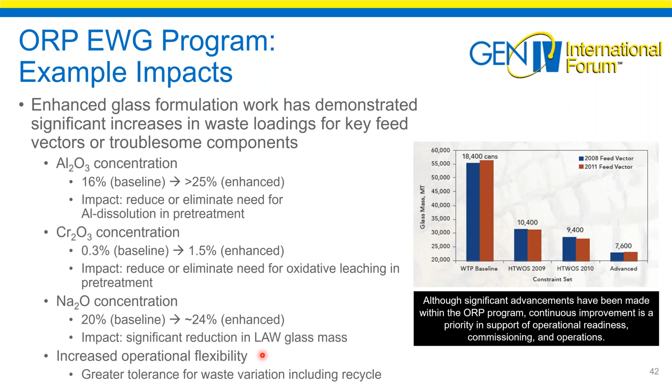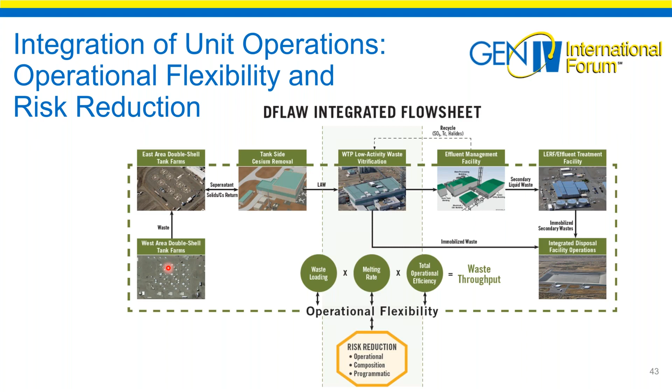Again, I'm not going to go through this, but the WTP facility is driving toward these. I want to reiterate that if you optimize the WTP facility, but pretreatment can't keep the facility fed, or the tank farms can't keep TSCR fed, that's a problem. The integration of these components of these different unit operations is key. We've talked about it, the WTP facility can do things, open up windows that allow pretreatment and maybe the tank farm operations to make other decisions than they would be making.

So I think this is one of the next to last slides. I'd like to throw out a couple operational thoughts. Hope you find this somewhat intriguing.

We talked about this integrated flow sheet, and a lot about not focusing on optimizing a specific unit operation, whether that's tank farms specifically, pretreatment, or the WTP facility, but you need to look at the systems approach, optimizing the entire flow sheet instead of a specific unit operation. Not saying those are mutually exclusive, but generally you need to be thinking about how to optimize total waste throughput and operational efficiency. To do that, open lines of communication among all the unit operations are key.

You need to share your knowledge of the advancements you've made, the limitations you may have, the concerns or unknowns you may have, and do not work in a vacuum.

You need to avoid implementing things that may cause downstream impacts. I've talked to my tank farm people, I've talked to the pretreatment guys. Anything that's added to tank farms into that flow sheet, into the process, ultimately flows downstream through this flow sheet. If it's not taken out, the WTP facility has to deal with it. If it is taken out, it better have a disposition path. So again, things upstream can have huge impacts downstream.

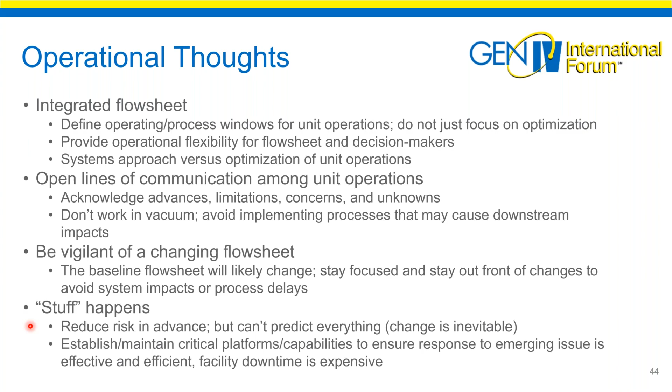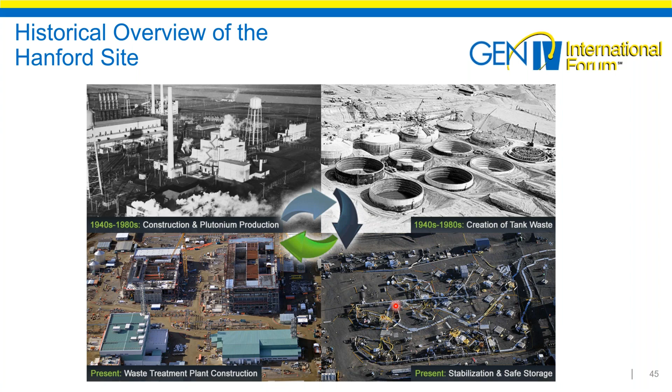Here's kind of the historical overview. Back in the 40s and 50s, a lot of plutonium production occurred for defense programs. Again, the waste generated totaled 55 million gallons of waste in those 177 tanks at Hanford. Present day, we're in safe operations and safe storage, and we are transitioning within the next year or two to start feeding the direct feed low activity flow sheet with transferring supernatant into the LAW vit facility.

With that, I apologize for running a little bit long. Any questions or comments I'd love to address. Thank you for your attention.